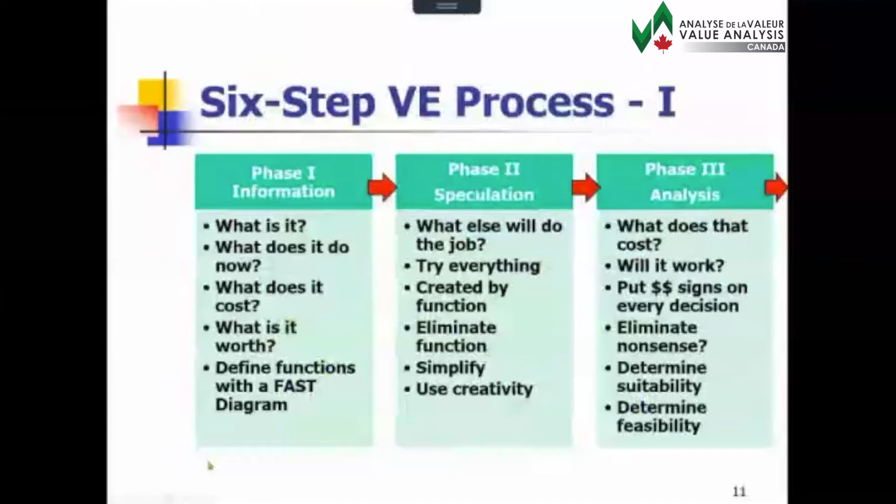Takes a second to work through this one here because of the way it comes in. Of course you're all familiar with the concepts of function, quality, and cost, and that three-legged tripod, and the 6-step value engineering process.

Okay, so here we go. So what this is, is basically the sum total of experience from when I was in college. I had a couple of classes where our faculty talked about value engineering, but it wasn't really until I got out into the real world and actually started doing value engineering, and then realizing some of the problems that beset some of the value engineering efforts, and so on.

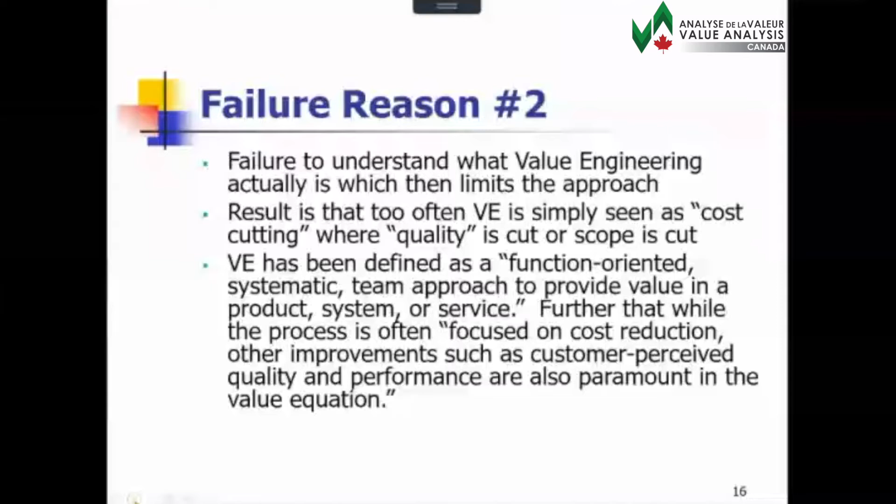One of my experiences was on a prison project here in the United States, where someone on the team started looking at staffing levels and the configuration of the prison. They were able to eliminate 1 guard per shift by reconfiguring how the prison was set up. You might think, one guard per shift, what is that? But keep in mind that prison is open 3 shifts a day, 7 days a week, 365 days a year. If you're able to save 1 guard per shift, that's a huge savings.

That's one of the issues we get into - people just want to look at construction costs and they don't want to look at these other areas.

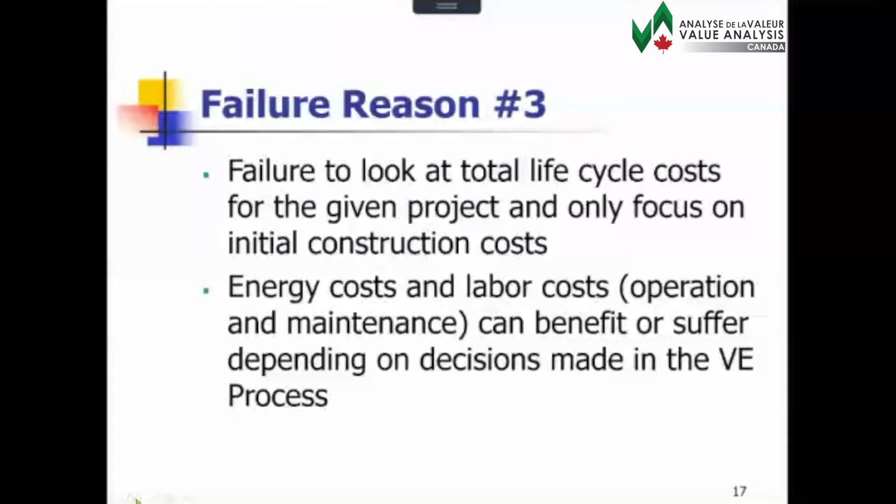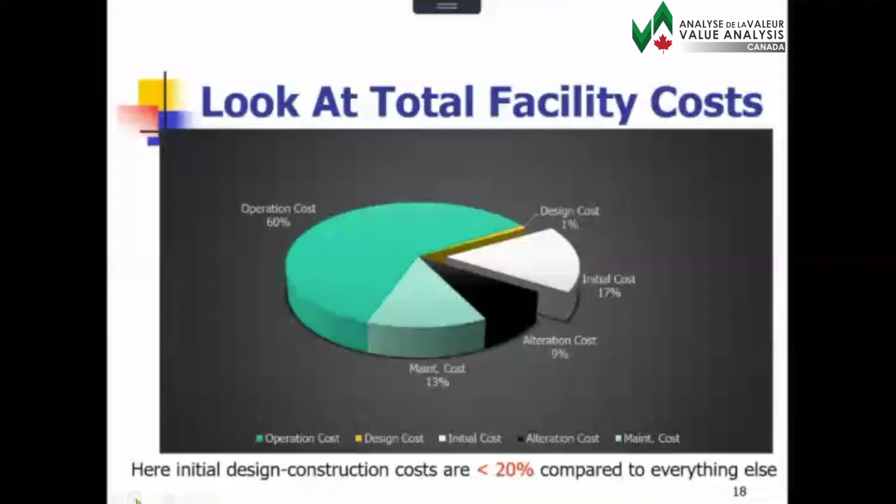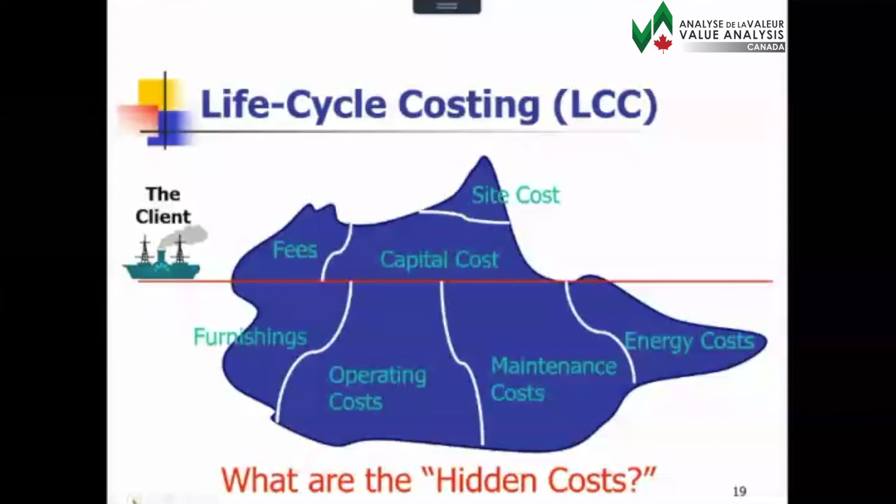And he's mentioning some of the people that should be there, and he says, oh yeah, and we've got our food court consultant coming from the East Coast. I almost fell over laughing. I said, a food court consultant? What is a food court consultant going to do? And he says, trust me, go there with an open mind. I shouldn't have been so cavalier.

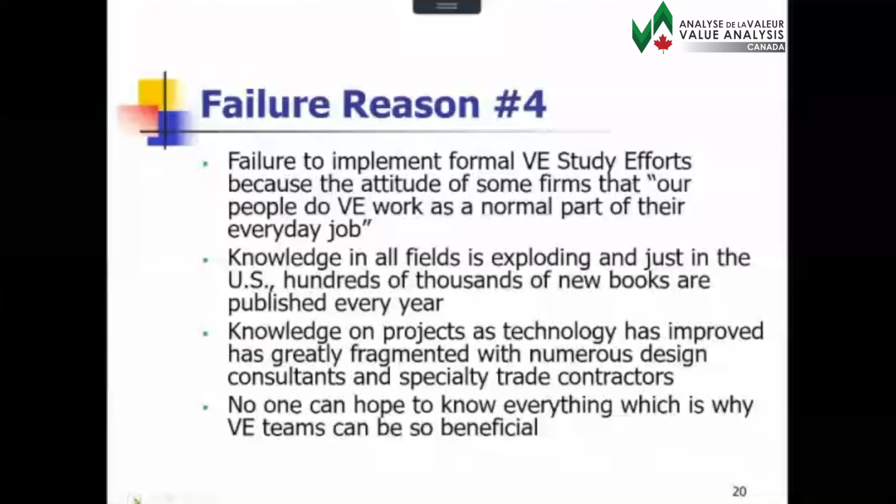So that's one of the challenges a lot of times we run into, is that our industry has been so fragmented. There's subcontractors and third tier subcontractors and fourth tier subcontractors, and so nobody can know everything. That's why I think value engineering can be such an important concept to get across of why this needs to be employed.

And the attitude from a whole host of managers is, well, what happens if I train Howard over here, and I spend all this money training Howard, and Howard goes to work for Mushtaq, or Howard goes to work for Brian, or whoever the case may be. So it is, what happens if we train them and they leave?

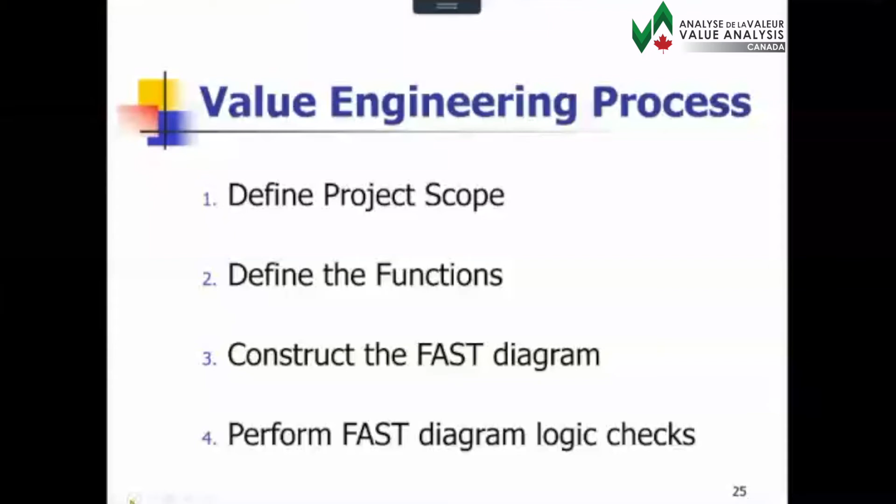Next slide. Everybody's kind of familiar with this, the FAST diagram, with your basic functions and secondary functions. So we'll skip past this, but this was from R. Kaufman's book on value management. I just put it in there as a source, because I certainly didn't come up with the FAST diagram, but I think it's a very powerful concept.

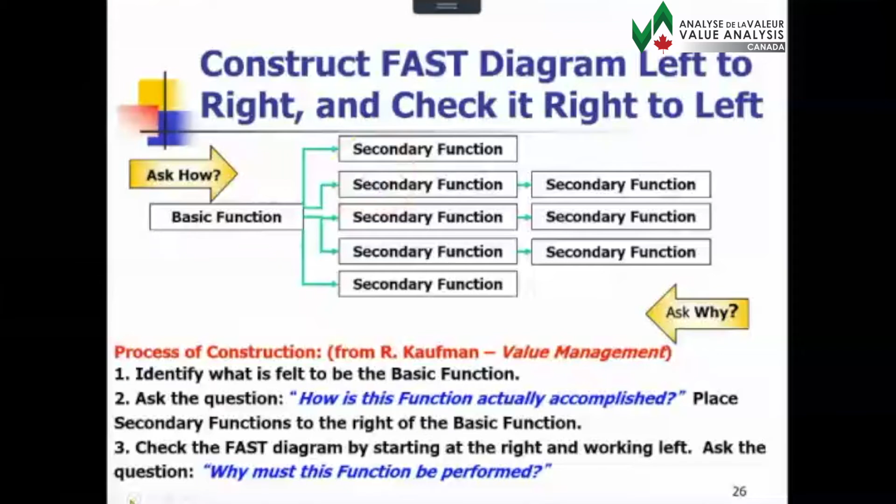Next slide. This is an example of a fast casual restaurant, obviously the restaurant has to sell food, and if it can't sell food, there's no reason for the restaurant. But then you take that primary function and break it down into secondary functions. You look at a 4,500 square foot restaurant and think, why would you spend a value engineering study on a restaurant? How do you ever hope to recover the salaries and everything from the study? But this was a restaurant concept that got rolled out all over the United States, and they were looking to build thousands of these restaurants.

Same thing, look at some of the value engineering Walmart has done for their neighborhood markets, because they're not just looking at one neighborhood market, they're rolling this concept out all over the place. Next slide.

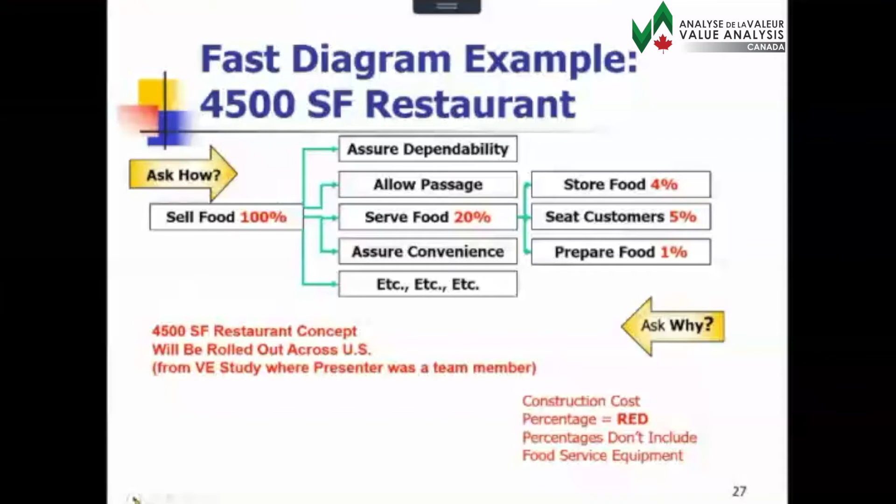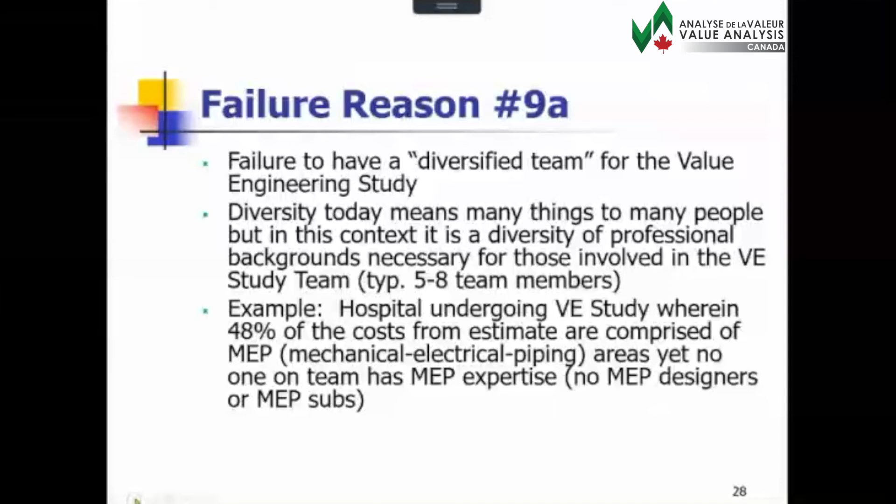Failure to have a diversified team. What I mean is getting a diversity of professional backgrounds in there. We hear, especially here in the US, about diversity all the time, but in the context of value engineering, we're talking about a variety of backgrounds. For example, I was working with a hospital group planning a value engineering study, and I looked at the firms they identified, and nobody was from an MEP background, either MEP design or MEP construction. Given that 48% of your costs with a hospital are MEP costs, that's just grade A industrial strength stupid. I told my client, you're not going to like me telling you this, but where's anybody on this team that really knows anything about mechanical, electrical, piping systems, fire protection systems? They looked at me for a second and said, that's a good point. Okay, next slide.

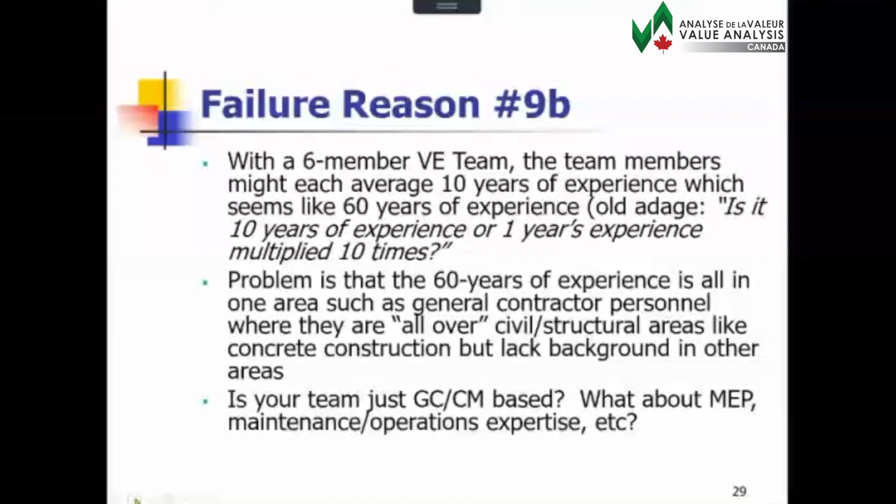Everybody's always heard this: you have somebody who says they have 10 years experience, but they really don't have 10 years of experience, they've got 1 year of experience multiplied 10 times. So we want people with a relatively wide background, including experience with the projects we're on, which I always think is helpful. Some people say they'd rather bring in people who've never worked on that type of project because they don't want them contaminated by their prior experience. There's a little of that, but I think it's good to have experienced people, particularly with operations and maintenance issues, because these are the people who live with these projects and see the consequence of bad decisions made in the design and construction process. Next slide.

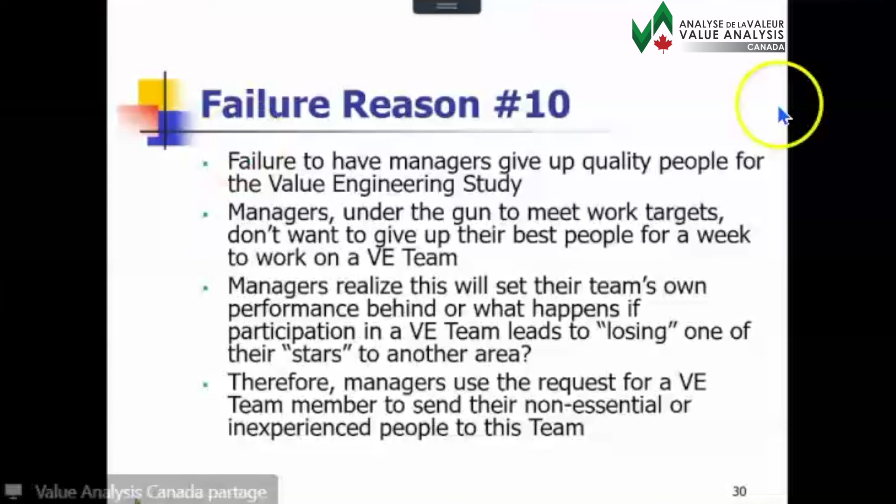Related to sending people to training or putting people on a VE team is managers don't want to give up quality people. So they'll look and say, well, gee, I've got Saad over here, or Sajad over here, or Howard over here, but those are valuable employees for me. So here's what I'm going to do. I've got Neil over here, and the only reason Neil was hired is because his brother-in-law is married to somebody, et cetera. So guess who goes to the value engineering study? Probably one of the people that's not going to be a real contributor. That's one of the things too, you want good people as part of these value engineering teams.

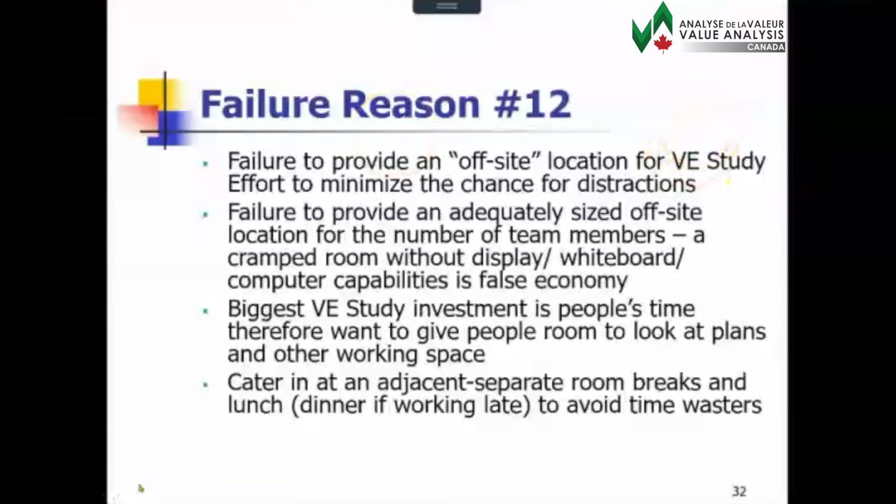One of the things I'd like to do sometimes with my students at UNLV is take away their cell phones and laptops so they couldn't be texting friends or talking on the phone. Obviously, we can't do that, but one of the things we want is people concentrated on that value engineering study. People shouldn't be on their cell phones or answering emails. They can do that during a break or at lunch. This always used to be a problem because phones have been around forever, but that little computer I've got in my hand is really, really problematic. It bogs down the effectiveness of these value engineering studies if you don't ride herd on something like that.

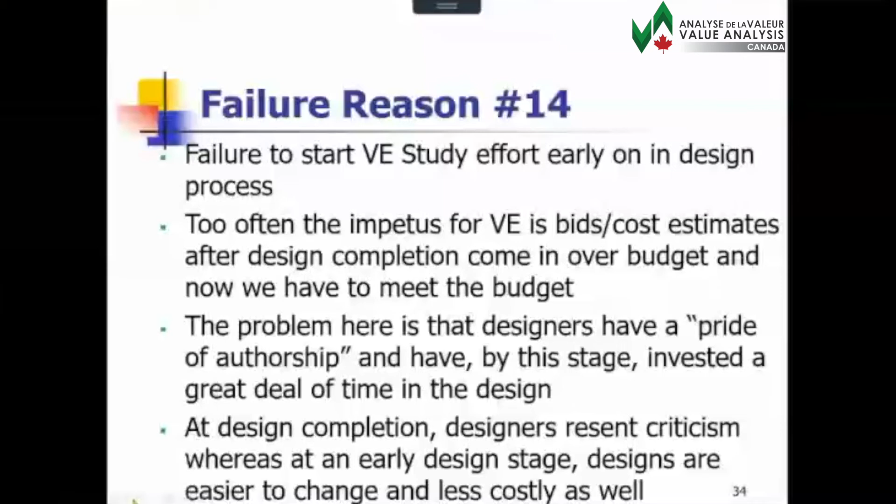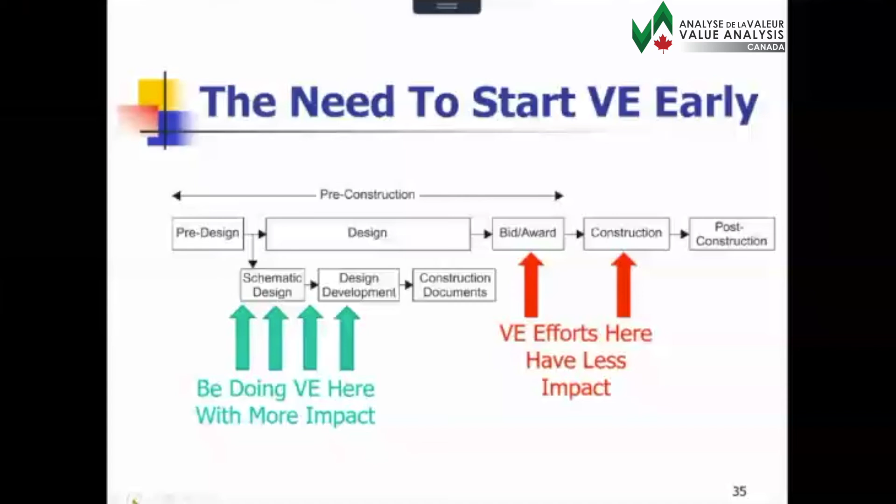You're all familiar with this curve. This first came out of GSA, the General Services Administration, federal government here in the U.S. That's the first place I ever saw it. It's been picked up, I've seen this in various value engineering papers, obviously picked up here in the U.S. by CII, the Construction Industry Institute, and so on. What it shows is that owners need to understand, and you need to get through to the owners and developers, that that's where they're able to make the biggest impact, not down the line there.

This kind of gets back to why we want a facilitator. You've got 40 hours and you don't want to get buried in the weeds on a value engineering study, not looking at the most important things.

I've always liked the concept of Pareto's law of optimality. This was from one of my degrees as an undergrad, an economics degree, and they talked about this. Vilfredo Pareto was an economist over in Italy in the 19th century, and he studied income distribution. What he found was that about 20% of the people held 80% of the wealth in Italy. He went to other countries, and no matter where he went, he saw the same trends.

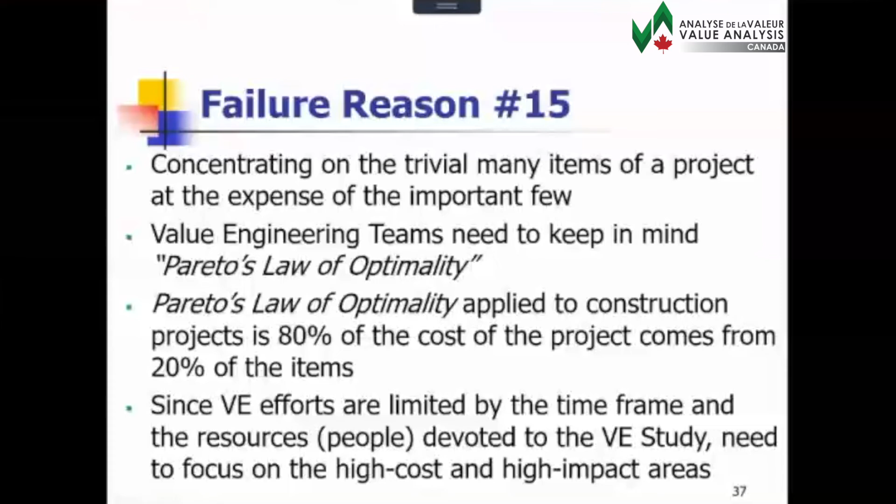And of course, there we see kind of a rough illustration of that 80-20 rule.

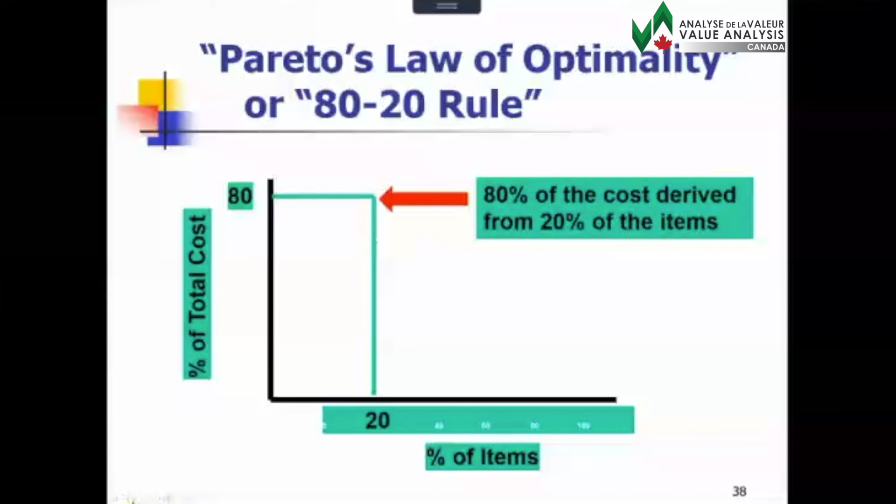Failure to have value engineering information available. One perfect example, although it's happened a bunch of times, is we were doing a value engineering study on about a $200 million section of the Clark County flood control project, which at the time had about a billion dollar overall budget, that's grown quite a bit since then. This is 200 million back in the early 90s. We were supposed to have all of this cost estimating information on an estimate that had been done before we actually started the value engineering study.

And here we are, Friday, and we don't have anything. This was before the internet, this is 92, 93. Didn't get anything.

Neil, excuse me, I think somebody's microphone is on. Can you please mute yourself? I think one or two people have their microphones on. Go ahead, sorry about that. Go ahead, Neil. No problem. Typical meetings in the age of GoTo and Zoom and WebEx and so on and so forth, right?

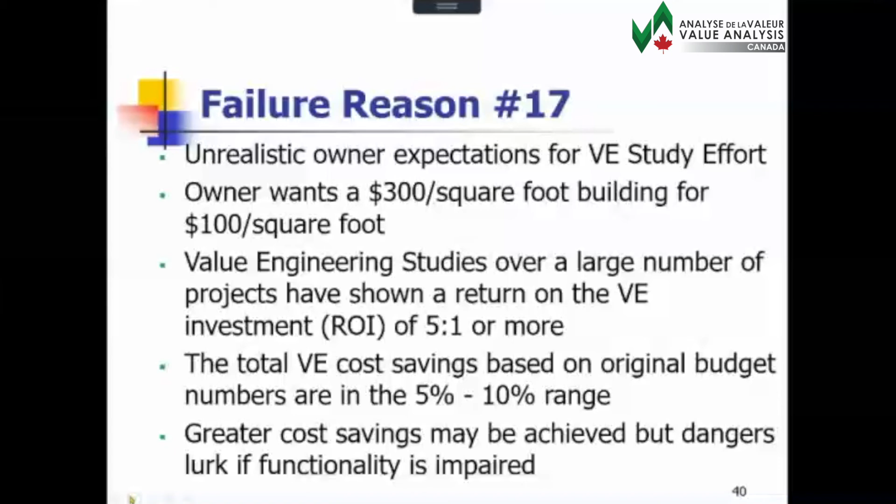Lack of incentives if you actually implement some of these VE study results. What I mean by the lack of incentives is really from the design side, because if you're making your designer go back now and redesign things, the designers really dig in their heels. We talked about the pride of authorship aspect, but here's a designer who might be working on an 8%, 10% fee, and they've already spent all the money.

It's a $10 million project, and they've already spent $800,000, which was their 8% fee on the project. They don't want to go back and redesign. So if you want redesign done, from my perspective, you've got to pay for it. Obviously, it's going to reduce the overall impact of the savings, but you need to fairly compensate the designers, because designers don't want to do free redesign.

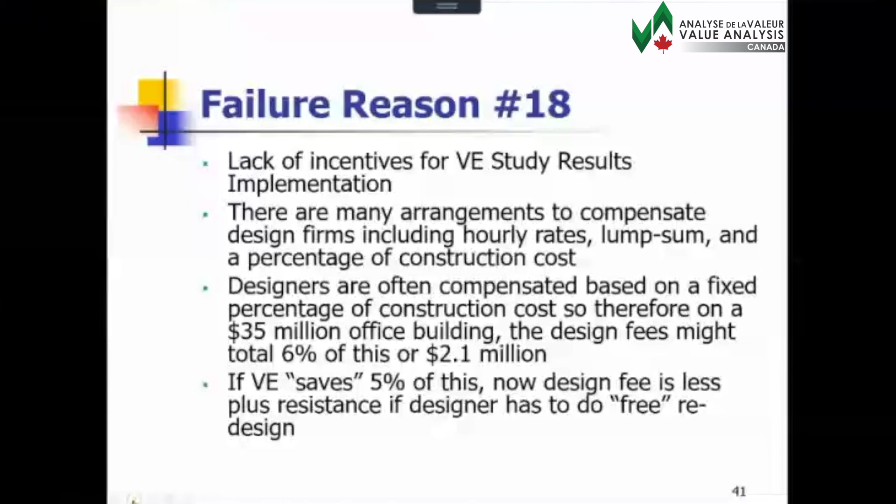Go back, or go to the next slide.

With value engineering change proposal clauses, one of the things that we run into is that the response is so slow on other aspects of the project, getting answers to RFIs and so on. A project that I was involved in Chicago was another hospital project.

At the time, it was about a $120 million project, and I was working for the HVAC contractor. We, as the HVAC contractor, were subcontracted out to a mechanical piping contractor that was self-performing the piping, but had subbed us the mechanical. They were a subcontractor of the general. There was a construction manager, there was an owner, and then of course there was the design side with all the consultants down the food chain.

We would see opportunities for value engineering, and there was a value engineering change proposal clause in the contract. But the problem is that it was taking us 9 weeks to get answers back to simple questions. Our attitude was, why should we spend money on value engineering if by the time we get a response back, we're already going to be past that part of the project? So a lot of the value engineering ideas that we had just never got submitted. And so that's a problem.

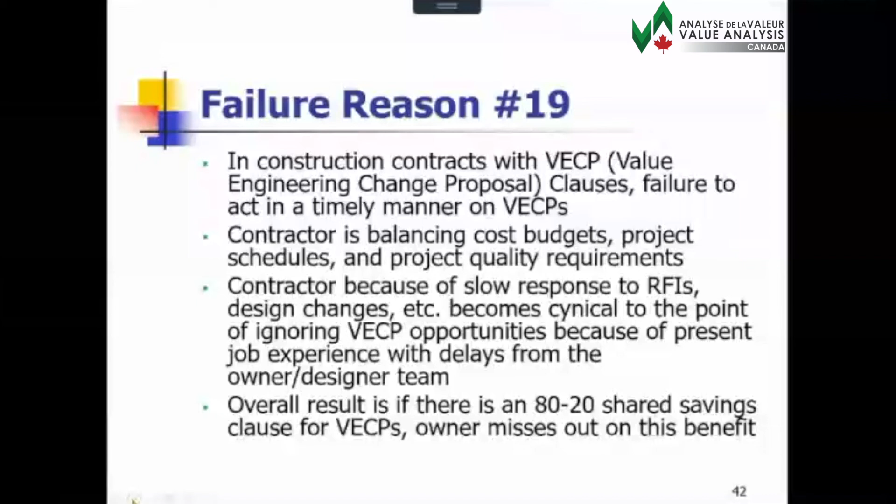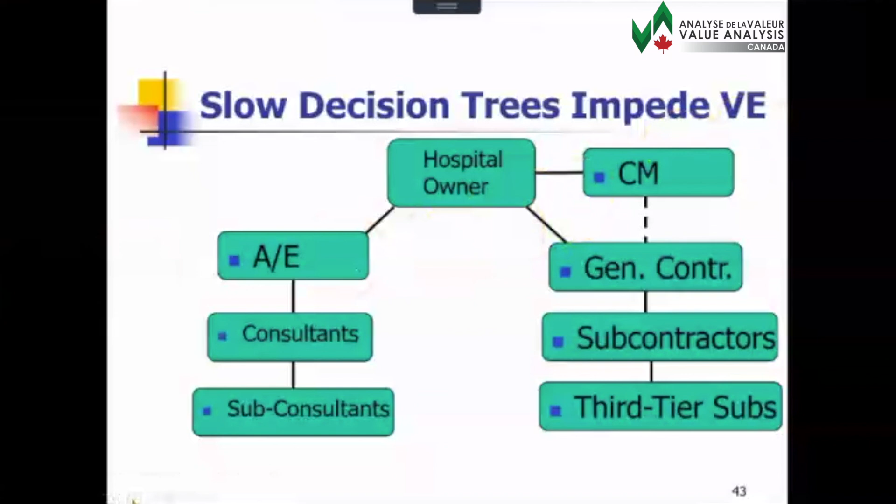So that's an example there on that hospital project, where we were down on the right-hand side as a third-tier sub. And yet by the time we got an answer back from one of the sub-consultants, going through that whole food chain on the design side and the construction side, it was taking us 9 weeks to get answers to simple questions. Let's go to the next slide.

Failure reason number 20 is fraud with value engineering change proposal clauses. So let's say that you've got an 80-20 shared savings clause in a contract.

A contractor comes up with a value engineering change and says the savings are going to be $1 million. The owner is like, wow, this is great, this is fantastic, $1 million savings. I'm going to get 800,000. Happy to pay the contractor 200,000. What do you end up with? Well, if that real number was 1.25 million, the contractor is not only going to get 200,000, they're going to pocket another $250,000. So one of the things that's got to be done on these value engineering change proposals is doing fair cost estimates.

This is an extreme case, but I've seen this thing happen. I had a contractor's project manager a couple years later brag to me that this is exactly what they did on a project, and they were able to get it by the owner. I think that's really, really sad, and not where we want to be.

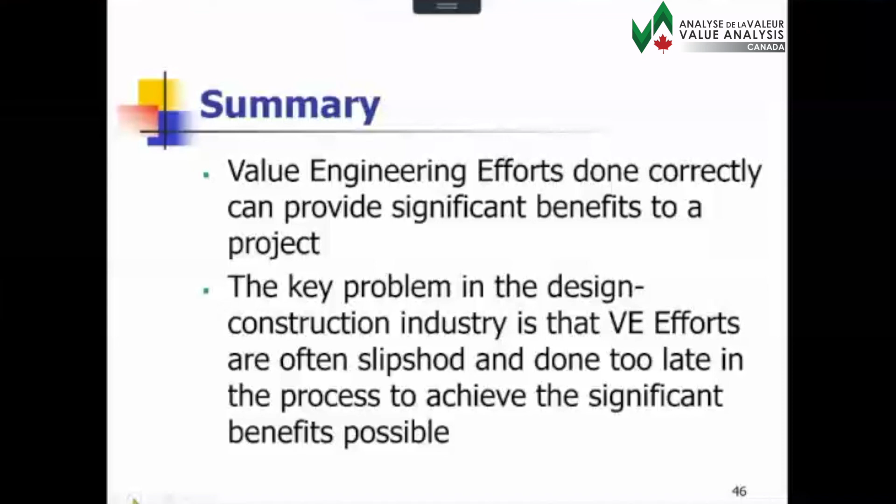And so there we go. To our Value Voices audience, hope you've found at least a couple of things here of use, and certainly in the time available, open this up for any questions.